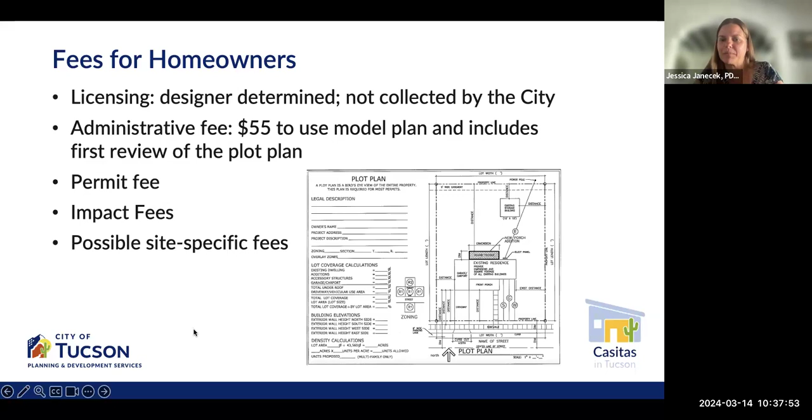So this is intellectual property, right? Designers and firms will enter into agreements with homeowners directly, and so you will still retain your intellectual property.

When a homeowner submits a plot or site plan, they will also need to include a document that indicates that the designer or firm has granted them permission to use the model plan that we have on file.

So that is what needs to be submitted by the homeowner, or whoever is using your plan, to ensure permission is given to use the documents we have on file.

It's also advised that you have documents that protect your intellectual property for clients and homeowners to sign.

We have a guide that you can use to help process through using the system if it's new to you, which we will drop into the chat for you, as well as have on our website. You can find it currently on the PDSD website, but we'll also include it on our Casitas in Tucson website.

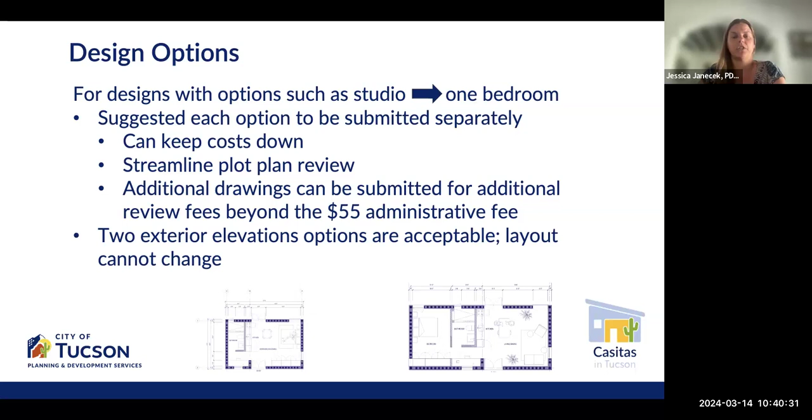Now we're going to get into the requirements for a model plan submission and thinking about our construction documents.

For full construction documents, everything needs to be in accordance with the 2018 International Residential Code, our local amendments, and City of Tucson adopted design ordinances.

Casita plans are not required to be prepared by a registered design professional unless there are any structural elements that exceed 20 feet in length. We will also be providing some additional materials and supports to guide you through this.

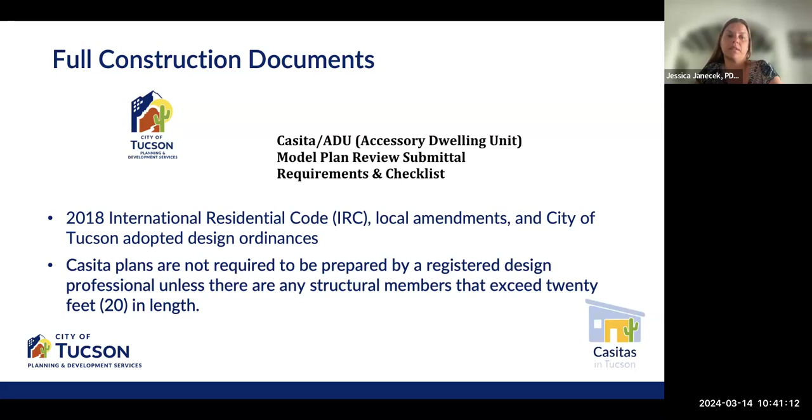The submission format, how the documents need to be formatted when you submit them into the TDC: all documents shall be in PDF format with graphic scale, rotated so pages read upright. Verify that you've unlocked and flattened all the drawings and reports.

Sheet title block sizes and locations shall remain constant on each page of the plan set. Reserve the same location, a minimum size of 3 by 5, on all plans for city stamps.

Files should be saved in black and white. Light colors may be difficult to see after it's switched into grayscale. Documents and reports must be submitted as separate PDFs for each document type, for example, your plans, your calculations, specifications, etc.

Now we'll get into what each of those are. Your model plans must include the following drawings: a floor plan, which is a scaled layout from top down of the building layout. Floor plans must include lines for both sides of each wall and identify the dimensions of every wall opening.

A foundation plan specifies the width and depth of all footings, location and size of reinforcement and anchor bolts, location and type of all structural hold downs, and foundational dimensions.

A roof plan must include the size, spacing, and span of all rafters, joists, beams, and other structural elements, and indicate how the design meets the cool roof requirement, such as having a white finish.

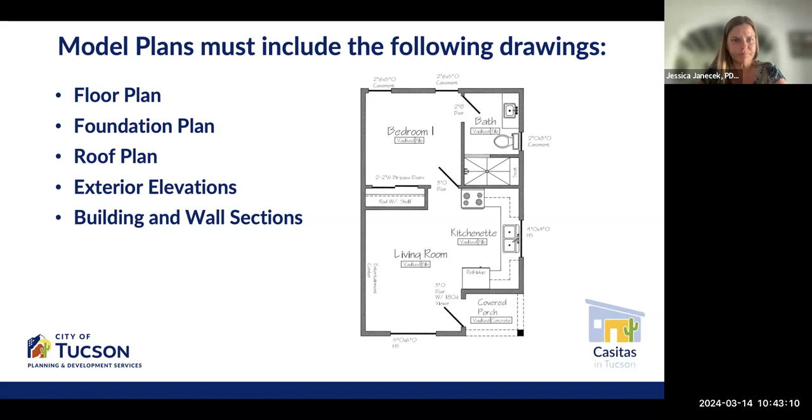As I said earlier, all new residential buildings in Tucson need to be in alignment with the 2018 International Residential Code, local amendments, and City of Tucson adopted design ordinances. The Inclusive Home Design Ordinance is a visitability code that provides guidance for all newly built dwellings in the City of Tucson for minimum accessibility criteria, such as lever type door hardware and zero-step building entry.

The installation of solar panels is not required, but must be prepared for in the future if not included. This means reserving roof space and electrical service capacity for future panel installation. You can review the solar readiness ordinance for specifics on how to meet the requirements.

For model plan design purposes, the electrical should be designed as if the casita has its own electrical service. This will facilitate the plan review process and can be revised when a site plan is submitted to reflect using the existing electrical service of the primary residence as necessary. So for those who may not know, a casita can use the same electrical service, but it need not have to.

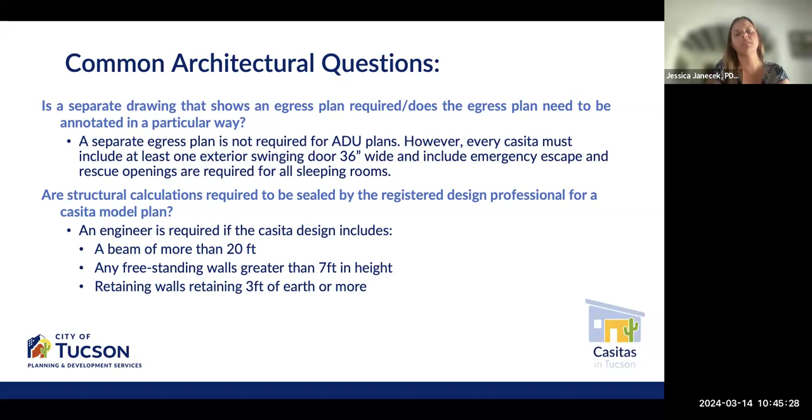Are structural calculations required to be sealed by a registered design professional for a casita model plan? No, unless an engineer is required if a casita design includes a beam of more than 20 feet, any freestanding walls greater than 7 feet in height, and any retaining walls retaining 3 feet of earth or more.

Lastly, of our architectural questions: can a design using prefabricated building materials be a casita model plan? Yes, but these designs are reviewed and approved by the state of Arizona, not the city of Tucson. So designs that have received an Arizona certification for a modular building can be included in the casita model plan library.

Now we would like to open it up for you if you have any other additional architectural questions, whether by dropping in the chat or unmuting yourself and asking them directly to our building staff. If we are unable to answer any questions today, we'll take note and report back out.

Hi, good morning, this is Annalisa. I'm one of the designers for the Casita Sama project.

I have some questions on clients who have reached out for the particular design, but then have questions on potential modifications within the existing design. For instance, if they wanted to do, we have indicated in the competition like a plasterboard soffit, but they want exposed joist, so structurally the details within the parapet detail might be slightly different, like how we would like to deal with the joist hangers to be concealed or not concealed.

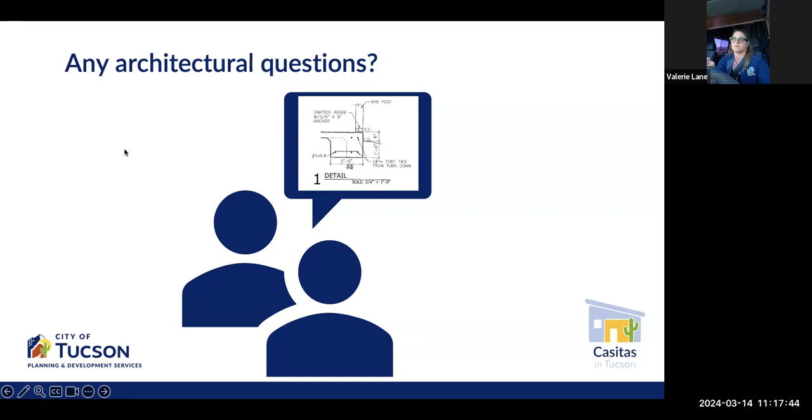Thank you, that's really helpful, and appreciative for all of your knowledge, sharing your knowledge and your resources. So thank you.

So if you continue to think of other construction-based questions, we will now get into the mechanical, electrical, and plumbing. But if you continue to think of anything, either drop them in the chat or send us a follow-up email, and we're happy to try and answer everything as best as we can.

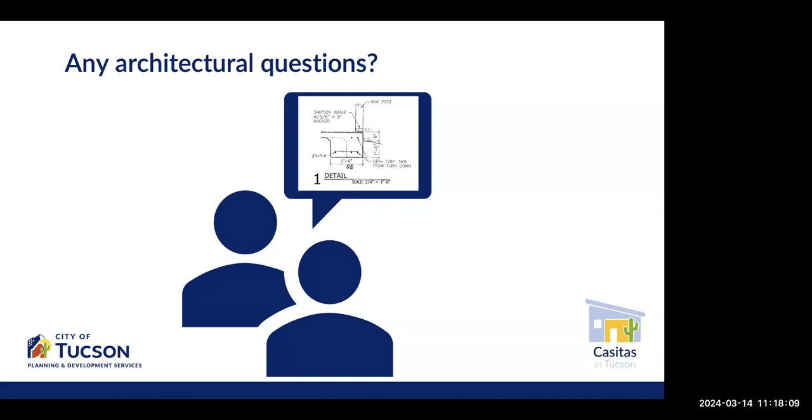So with that, we're going to get into our mechanical, electrical, and plumbing. The MEP design must be fully detailed and provided as part of the model plan submittal. Strictly speaking, the International Residential Code is prescriptive in nature and can be adhered to without a design professional. However, as these model plans will be available to the public, it may be in the design firm's best interest to have a licensed registrant prepare a stamped submittal.

We'll go through each of the elements, the electrical, the plumbing, and the mechanical, and have time for questions for each element.

So our first one is thinking about our electrical plans. What needs to be included? Your electrical plan needs to have a complete panel schedule, circuit designation, and riser diagram. You can use either a one line or a riser diagram. Your panel schedule needs to include a panel schedule and prepare load calculations.

There needs to be a note on the breakers set aside for the solar, whether you're directly including it immediately or just saving space for later.

Then the lighting and outdoor lighting code: all exterior lighting must conform with the outdoor lighting code. This is currently in the process of being updated, and our most recent one is from 2012. Model plans will not include a lighting calculation, but must include the fixture type, location, lumens, and color temperature in Kelvins. Things more likely to get the calculation approved include using only fully shielded fixtures or covering the bottom of the bulb, only letting the light shine down, that sort of thing.

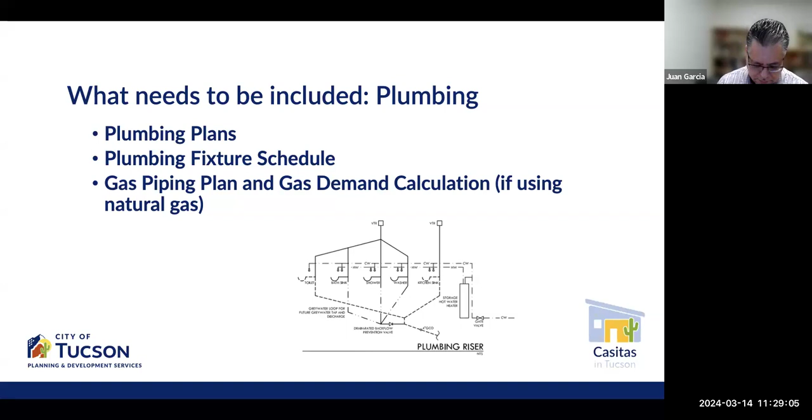I apologize, I lost my connection there. You'll need to include full plumbing plans, plumbing fixture schedule, and if you're using any kind of natural gas, you'll also need a gas piping plan and a gas demand calculation. Your plumbing plans will be fully dimensioned, showing riser diagrams for water, wastewater, and vent piping. When a site plan is submitted, it will need to indicate the current water meter will meet the increased water demand, so your plans should include water usage estimates.

We get lots of questions about water and what information needs to be included. A model plan must include a plumbing fixture unit schedule and water supply calculation to establish the minimum diameter of water supply piping from the water meter. When a site plan is submitted, the size of the water meter and total developed length of water supply piping must be shown. For casitas that share a water meter with the primary dwelling, all fixtures in both buildings must be included in the water supply calculation and demand schedule when that site plan or plot plan is submitted.

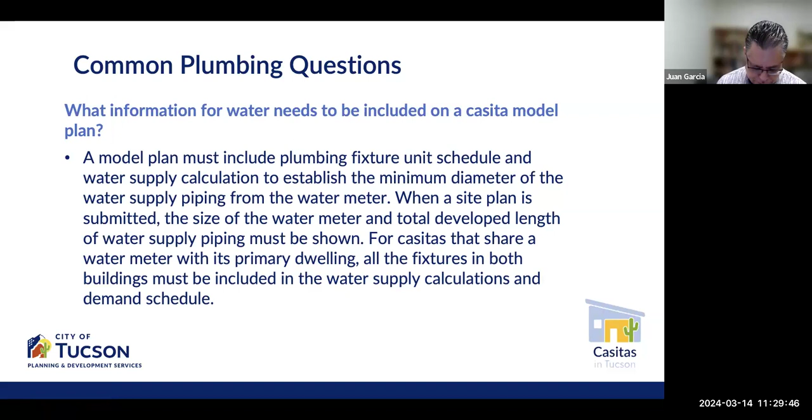And so, yes, getting into it, Valerie.

I want to take a moment—I don't know if Clayton's on here, but Clayton and I and Brad Lancaster worked this year to upgrade our gray water ordinance a little bit to make it easier to use. All of our casita designs have gray water designed into them. It takes some educating homeowners, but I want to encourage everybody to include those and put the infrastructure in now because they're going to be useful in the future. The gray water ordinance has been slightly modified this year, and if anybody has questions on how to use it or design for it, please email me—I'd love to help you out. It's a great feature for homeowners.

We like to call our site plans high performance site planning, and we can lean on local organizations like Watershed Management Group and other landscape architects who are able to help homeowners create efficient site plans.

Oh, sorry, Alex. Yeah, do you want to chime in as well?

Are you talking about the question I put in the chat? Yeah, I only got to the part where you didn't see where to raise your hand, so I figured I'd call on you.

Thank you. I think mine's a process question involving the MEP and site plan stuff we're talking about. I'm wondering if the overall goal is to make this as cost effective to the homeowner as possible, maybe not even having to engage design professionals again. Are these missing pieces, like the site plan and MEP stuff that needs to be site specific, something the owner can submit themselves, or their subs could submit the MEP stuff, without engaging professionals? Or will there always have to be a professional packaging up the site specific portion?

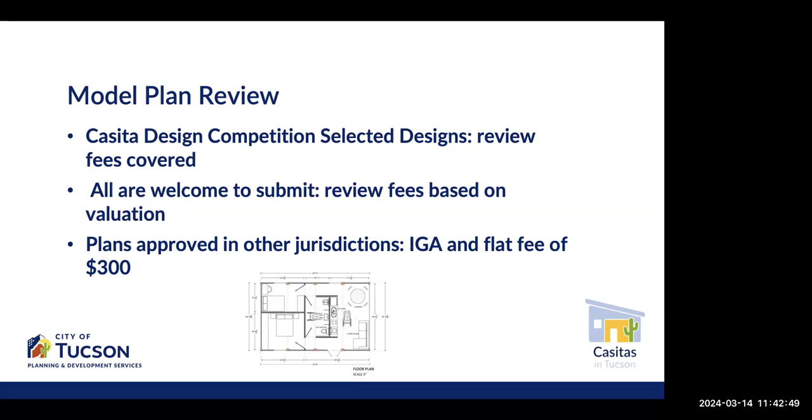So for those of you who have plans already approved in another jurisdiction that has an intergovernmental agreement with us and abides by building codes like ours, that applies. As for maintaining a model plan status, model plans are valid for 1 year and may be renewed until the applicable codes are updated. After a new building code is adopted, model plans may not be renewed, but they will remain valid until their established expiration date.

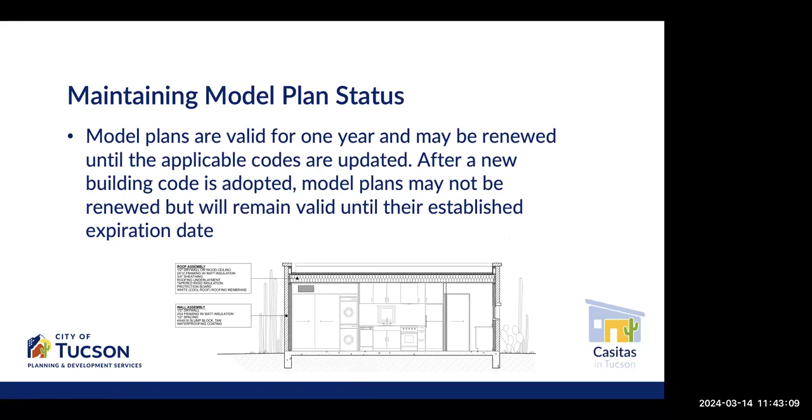Now for our requirements for the Casita model plan library. For the website, we'll want the name of the firm or designer with all contact information, because we're just helping to connect homeowners to you. Then we'll want the name of the Casita design, the cost to license the design, the size and square footage, the number of bedrooms, and the number of bathrooms.

We'll have both a short description, thinking like 300 characters or 50 words, and a longer description to meet the different needs of the website. Then up to 8 images, but please note which image you want as the cover image, the one people will first interact with when they see it. We'll also get the model plan permit number for internal reference, but we won't post that information. That'll be for us to check and verify the model plan when somebody does the site plan.

If you have further building and plan support needs, we have Ken Van Carson and Jeremy Hamblin also on our call today, so you can reach out and contact them. For submitting to the Casita Model Plan Library, that's Dan Bursick and myself, so once you have a model plan that's been approved, you can reach out to us and we'll make sure we're getting all the correct information, and then we'll work to update and submit it to our website. So that is really what we've got.